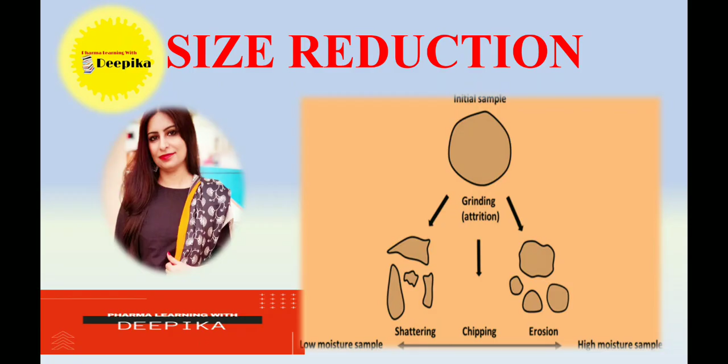Roller mill is based on the principle of stress. So when the material is crushed, stress is applied by rotating heavy wheels, mullers or rollers.

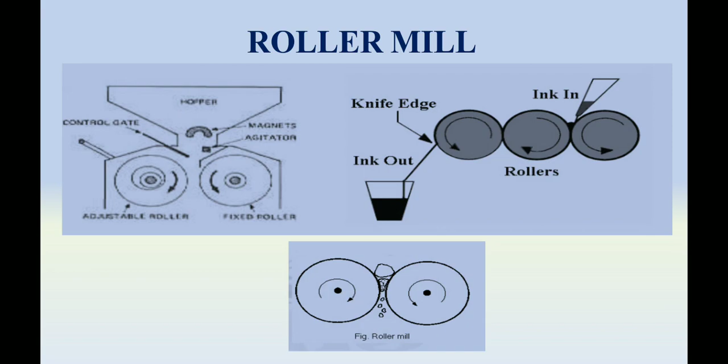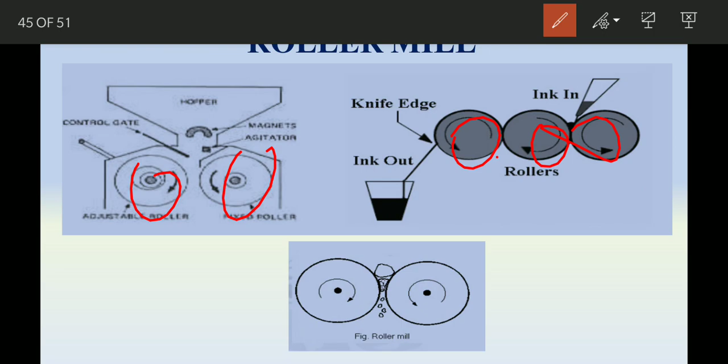Now let's talk about the construction of roller mill. Roller mill is a form of compression mill that uses a single, double or triple cylinder. They are mounted horizontally and rotated about their longitudinal axis, either in opposing pairs or against flat plates, to crush and grind various materials.

One of the rollers is run by a motor and the others are rotated by friction as the material is drawn through the gap between the rollers.

Roller mills use the process of stress, as we already discussed, and attrition in milling of solids and suspensions, pastes or ointments and some solid materials. The roller rotates at different speeds as the material is sheared as it passes through the gap.

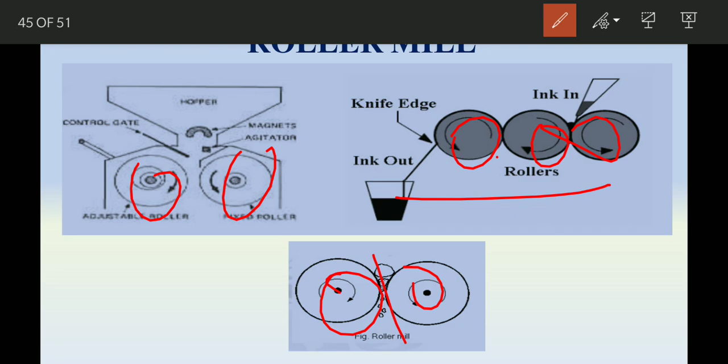So to obtain the desired particle size, the following should be controlled: first the gap, second the speed differential between the rolls, and the feed rate. So we have to take care about these three things.

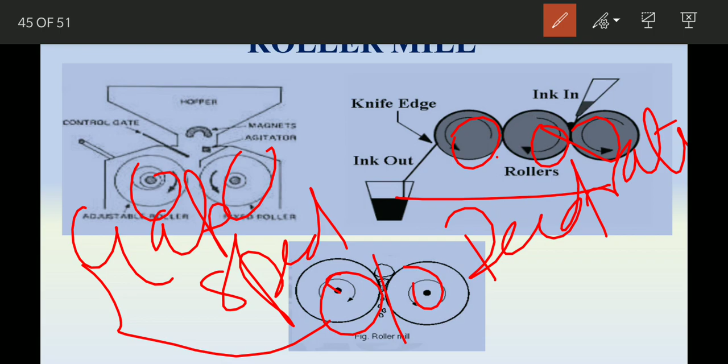Now, the design of a roller mill differs depending upon its application, and they are usually named according to the work they perform. Example, the first one is the cracker, which is used to crack grains or other types of friable material.

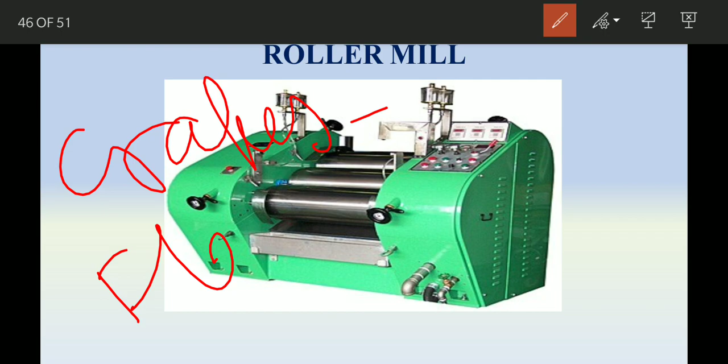Now flakers, which are used to flake grains or other material.

Now grinders, so roller mills that are used to grind in a feed mill.

Now crimpers, a roller mill that crimps grains.

Cracker-crimpers, a roller mill that cracks and at the same time crimps grains.

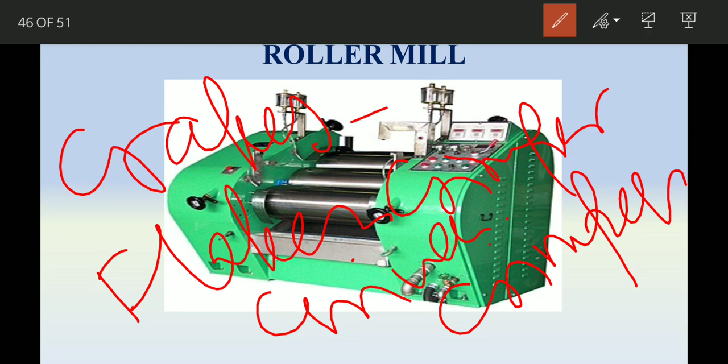Now the last one is the crumbler, a roller mill specially designed for breaking up pellets into smaller particles.

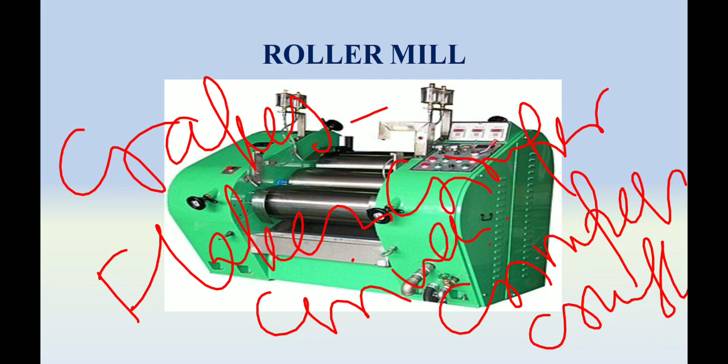So two variants of roller mill are available: the first one is the multiple or corrugated roller, and the second one is the ribbed or sawtooth roller.

Now let's talk about the working. The material is crushed between the two cylindrical surfaces, which can be smooth or have teeth or grooves on it. This is selected according to the nature of the product and the milling required.

The space between the cylinders is set based on the required particle size. Whatever particle size you need, you have to give that much gap between the two cylinders.

This type of milling generates very little fine matter. The compressive force between the two cylinders is ensured by a set of springs or by a hydraulic piston.

Now let's talk about some pharmaceutical uses. Basically it is used in the preparation of ointments, pastes, creams and other semi-solid preparations. Roller mills are also used for crushing seeds prior to extraction.

Now let's talk about the advantages of roller mill. Basically roller mill produces uniform, fewer fines and oversized particles when it comes to product quality.

The next advantage is it generates lesser heat as compared to the hammer mill. There is less moisture loss, a better work environment due to the low machine noise level, and it is energy effective, or you can say an energy saving machine. It reduces working hazards due to the dust generation from the milling material.